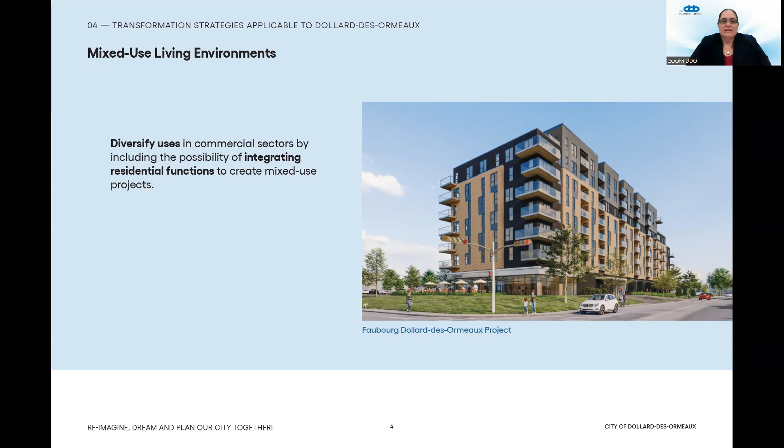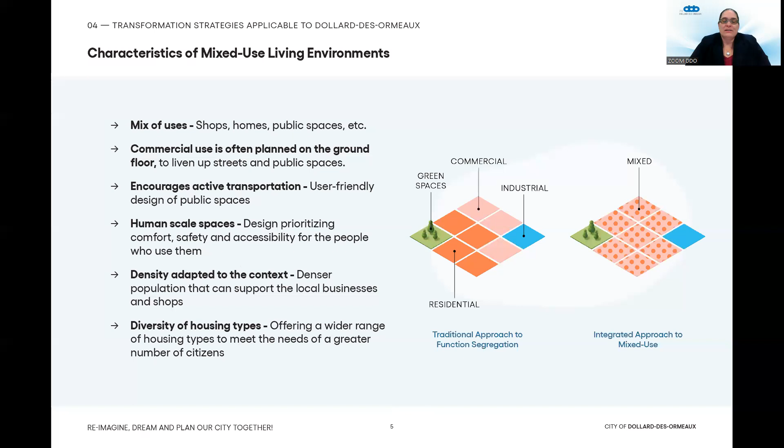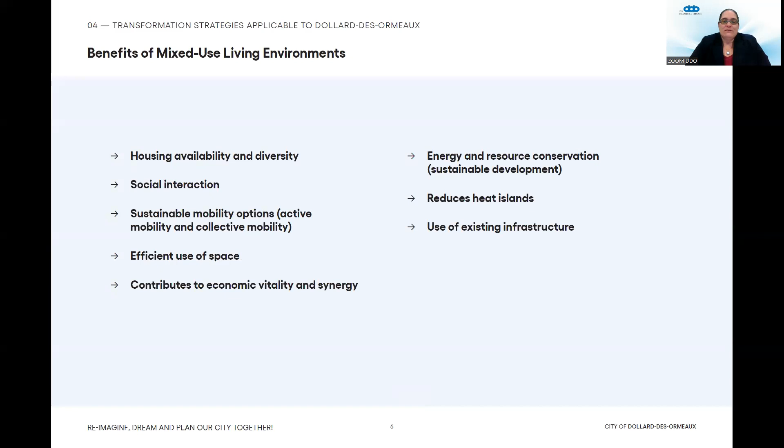The proposed regulatory framework constitutes the bulk of the following slides we will be presenting. Each of the standards will be presented in detail for each of the sectors presenting a potential for transformation. Please be reminded that these transformation sectors were the subject of a detailed presentation in the first video, which we invite you to consult. These are the same sectors that will be presented in the next slides.

Land use, as previously mentioned, is through the addition of a residential use to the uses already authorized in our commercial sectors. Lot coverage is the proportion of the land occupied by the main building, also known as the footprint of the building.

Density is the number of dwelling units in relation to a land area, usually measured in hectares. Parking ratio is the minimum number of parking spaces required per dwelling unit.

Amenity area is an uncovered or open recreational area with a minimum surface area that varies depending on the number of dwelling units. Finally, the bylaw concerning site planning and architectural integration programs, also known by its acronym SPAIP, ensures a coherent interface of future projects with the existing built environment.

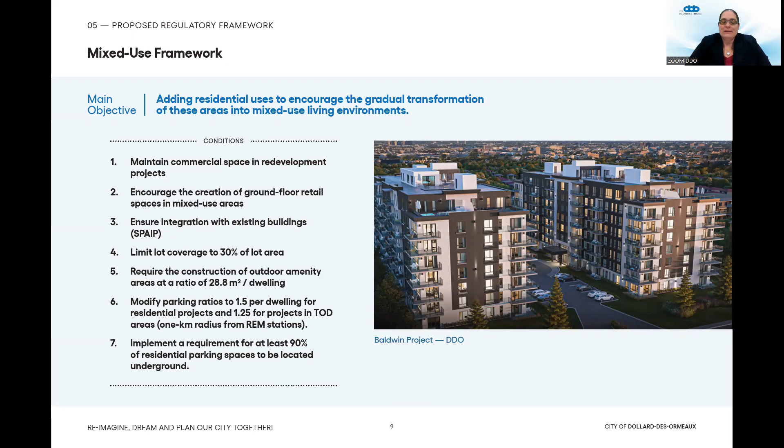In terms of density, what is proposed in the new urban planning program is comparable to the current requirements. In terms of height, which will be used to limit the scale of projects, we will compare the proposed heights with those currently authorized in our commercial zones. In most cases, the proposed heights in meters are lower than currently authorized.

In the four sectors situated on Saint-Jean Boulevard, the proposed density is 150 dwelling units per hectare, with a maximum authorized height set at 24 meters, or approximately 7 stories, for the two central sectors identified as Sector B, which includes Shakespeare Plaza and Centre Saratoga, and Sector C, which includes a gas station and the small Les Galeries Saint-Jean strip mall.

30 meters in height, or approximately 9 stories, for Section D to the south, which includes Blue Haven Plaza, Place Muley, gas stations and other businesses, and Section A to the north of the boulevard, which includes several car dealerships, a strip mall, and other businesses.

In comparison to current norms, the density is similar, and the maximum heights in meters have been reduced. In addition, a minimum commercial area will be required on the ground floor for projects located at intersections or when a commercial vocation is already present.

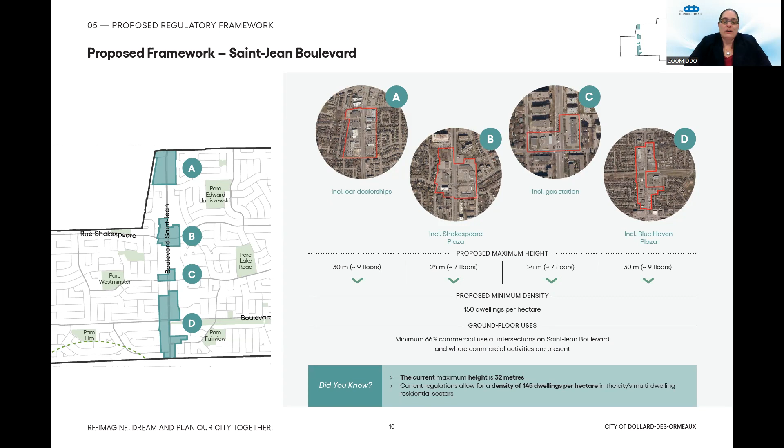The proposed density is 200 dwelling units per hectare, with a maximum height of 30 meters, or approximately 9 stories. For sectors B to D, the proposed density is 150 dwelling units per hectare, with a maximum height of 21 meters, or approximately 6 stories.

In comparison to current norms, the density is a little higher in Sector A, but similar in sectors B to D, and the maximum height in meters has been reduced. In addition, a minimum commercial area will be required on the ground floor for projects located at intersections or when a commercial vocation is already present.

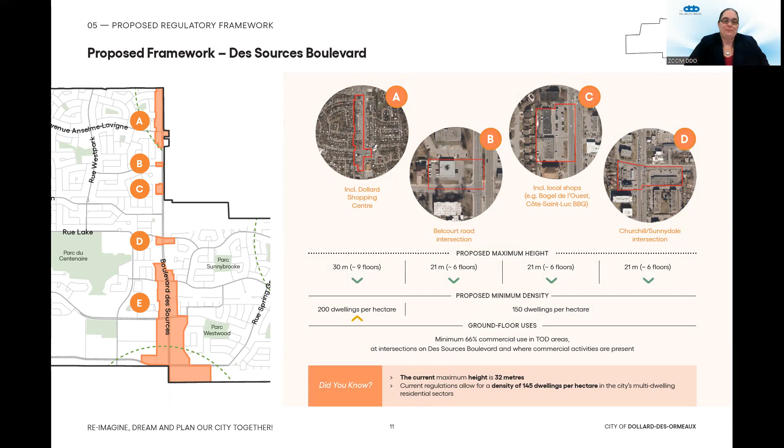We will now look at sector E on Des Sources Boulevard in more detail. Subsectors E1, E2, and E3 are located on either side of Des Sources, north of de Salaberry, in the direction of Pierrefonds-Roxborough. The proposed density in these sectors is 150 dwelling units per hectare, with a maximum height of 24 meters, or 7 stories, in sector E1, and 27 meters, or 8 stories, in sector E3.

The maximum height in sector E2 was set at 30 meters, or 9 floors, to take into account the new mixed-use building under construction at the intersection of Des Sources and Hyman.

Subsector E4 is situated on both sides of Des Sources and corresponds to the section of the boulevard occupied by Centennial Plaza. The proposed density in this sector is 150 dwelling units per hectare, with a maximum height of 27 meters, or 8 stories. The density is similar to that currently permitted, but the maximum height has been reduced.

Subsectors E5 and E6 are located on the southern limits of the city near Autoroute 40 and are situated in the transit-oriented development area of the future Des Sources REM station. Here we find Galerie des Sources and the land site located at the intersection of Brunswick. The proposed density in these two sectors is 200 dwelling units per hectare, with a maximum height of 45 meters for the Galerie des Sources land site, or approximately 14 stories, and 39 meters at the intersection with Brunswick, or approximately 12 stories.

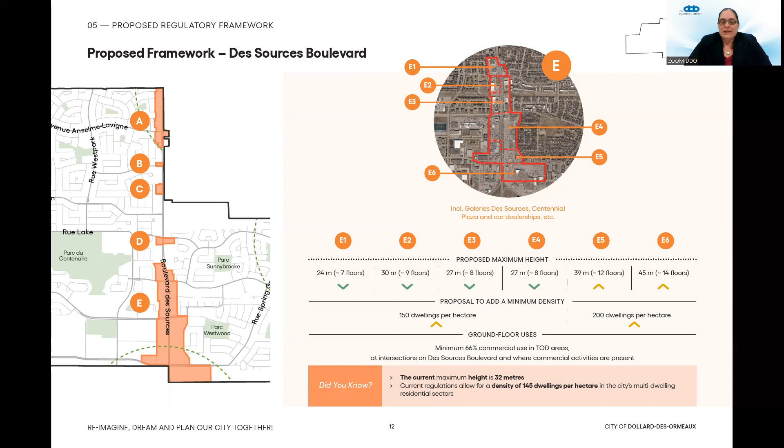These standards are the highest since the sector is inside a transit-oriented development area, at a distance of less than 1 kilometer from the future REM des Sources station. A minimum commercial area will be required on the ground floor for projects located at intersections in transit-oriented development areas, or when such activities are already present.

In the Marché de l'Ouest sector of de Salaberry Boulevard, the proposed density is 200 dwelling units per hectare, with a maximum authorized height set at 30 meters, or approximately 9 stories, as compared to the currently authorized maximum height of 32 meters. The density is higher here due to the proximity of public facilities and the future REM station, and the large right-of-way on de Salaberry, which separates Marché de l'Ouest from the existing residential area to the north.

In this sector, any redevelopment project must maintain the existing commercial floor area, both interior and exterior, and conserve the farmers market vocation.

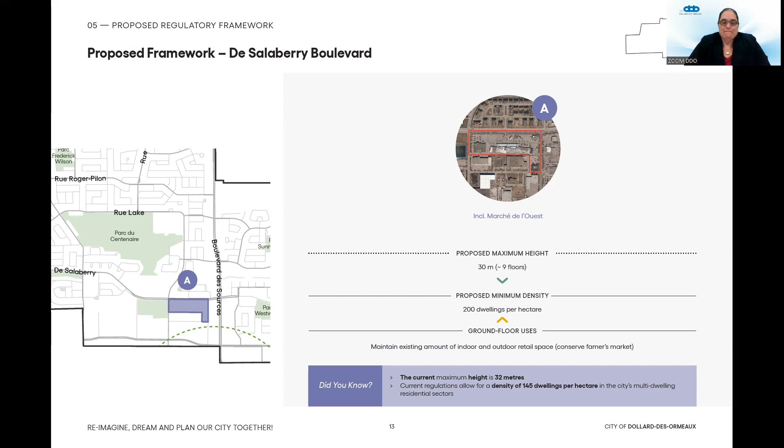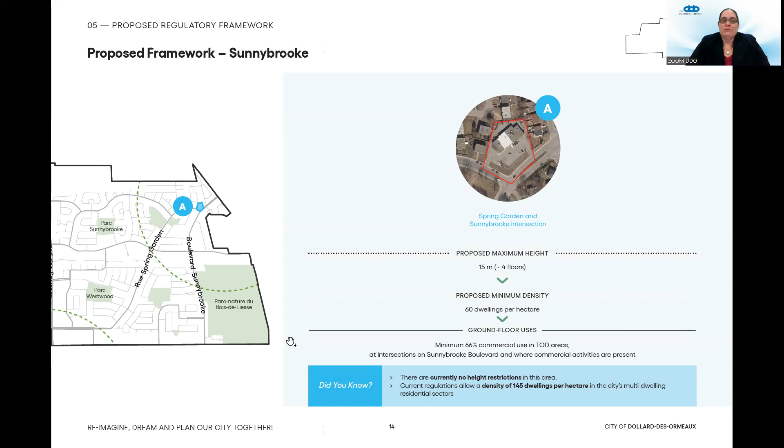In the implementation of the urban planning program, the action plan will call for a series of studies, plans, and measures relating to mobility in order to ensure the success of this strategy. These measures are to include a sustainable mobility master plan, which integrates the addition of active transportation corridors to the REM station, and the optimization of the bus and mass transit network in collaboration with the STM.

Other measures include improvement and safety programs for bike paths, sidewalks, and intersections, a program to improve public spaces near bus stops, a study and action plan in order to optimize traffic flows, and steps to encourage the extension of the Jacques-Bizard corridor.

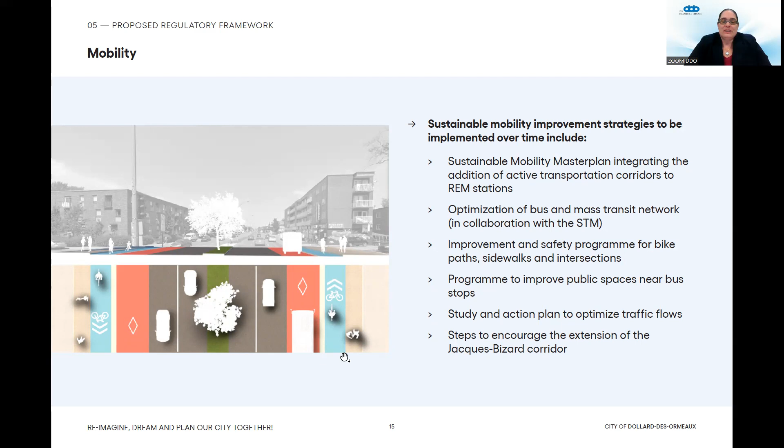Not everything will happen in the next year, just as not all sectors with transformation potential will be developed within the next year. The planning horizon is part of a long-term perspective of 10 to 15 years.

This is where the second of our two video presentations presenting the preliminary orientations of the next urban planning program ends. We invite you to watch the first video presentation, which is available on the city website. In it, you can read in detail the development proposals for these sectors with transformation potential.